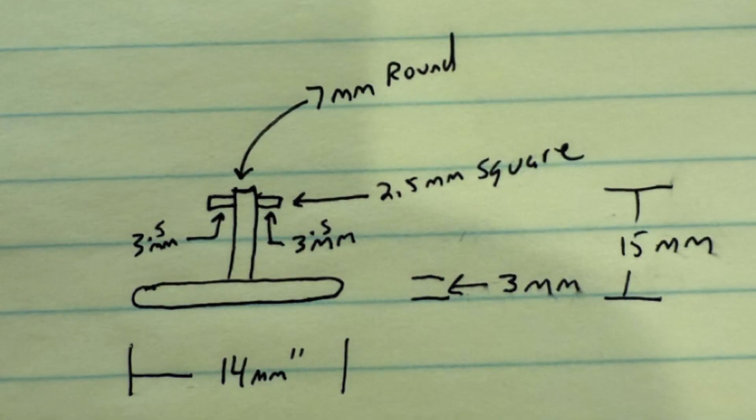Then we'll figure out how we'll build it. If you look at the part, you'll notice there's a large cylinder that makes up the bottom, a smaller cylinder on top, and two square extrusions that are clips. There's also a slot in the bottom.

After downloading and installing FreeCAD, you can start it by double-clicking on it, and we'll first create a new part by clicking the icons shown. We now need to give the part a name, and we do that by clicking Save and naming the part in the directory we'd like.

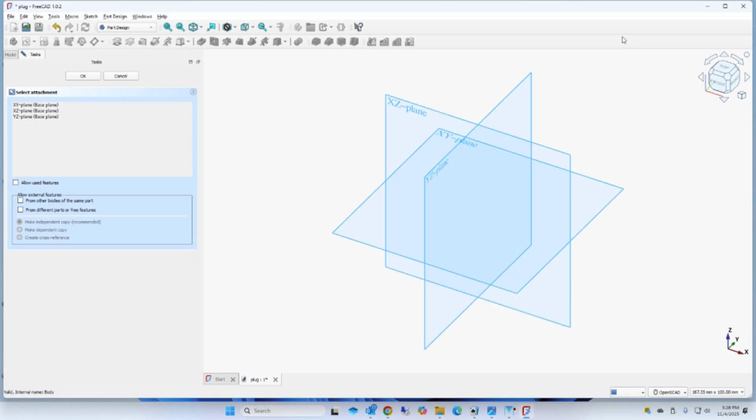And we'll call it Plug. Now you'll see that the name has changed. So first we need a body. The body is the actual part we'll be printing, and we did that by clicking the body, and now we're going to create a sketch for that body.

We select the XY plane and we draw a circle. This is the base of the part, and we're going to give it a dimension of 14 millimeters.

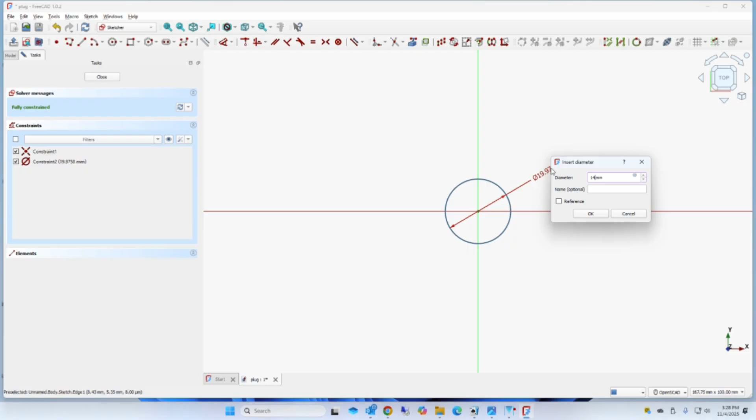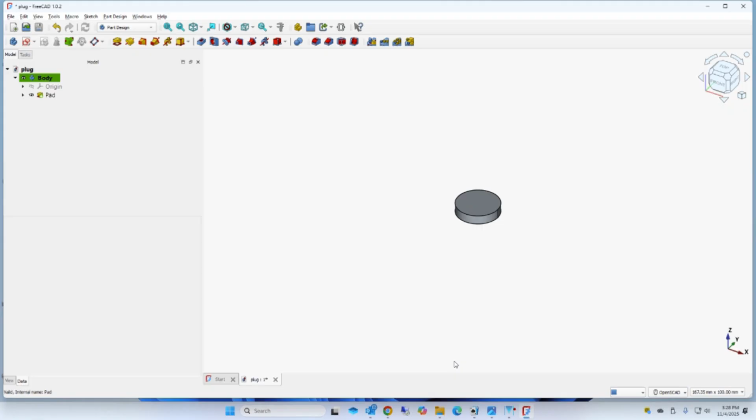We can now click OK, and we'll extrude that part by clicking the pad function and giving it a height of 3 millimeters. After entering the number by clicking off it, it'll change the size. We now have the part, a 3 millimeter disc.

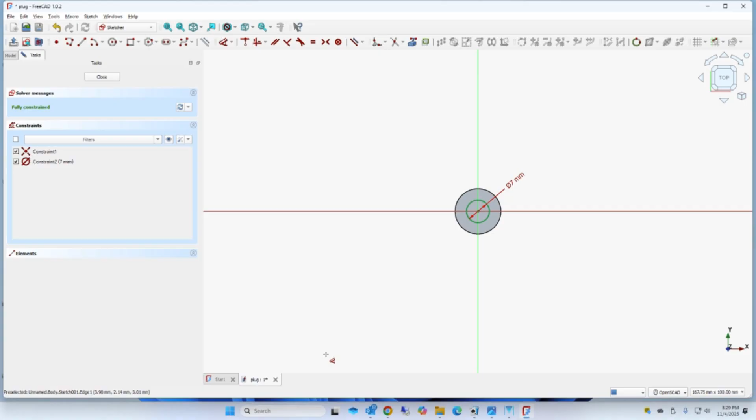We want to put another sketch on top of that disc for the stem. So we create a circle, just like we did before. We give it a dimension of 7 millimeters. We're fully constrained, which means everything's defined, and we click OK.

Now with it highlighted in blue, we're going to pad it, and we're going to make it 12 millimeters high, because the entire part's 15 minus the 3 millimeter base.

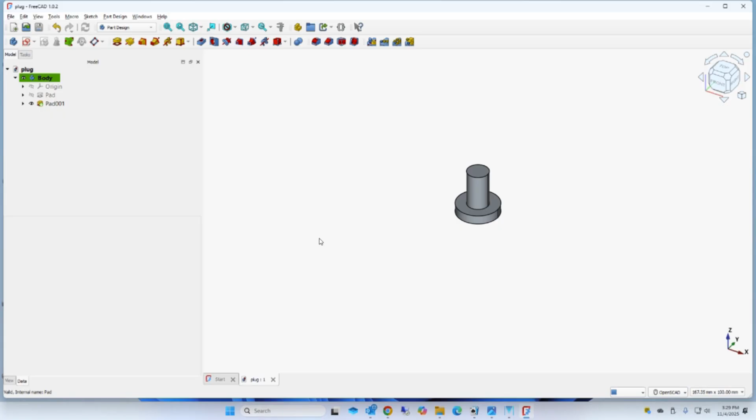Now we need to build the stem. Clicking the side view, we'll create a new sketch in the middle, and we do that by clicking New Sketch and selecting the plane for the side.

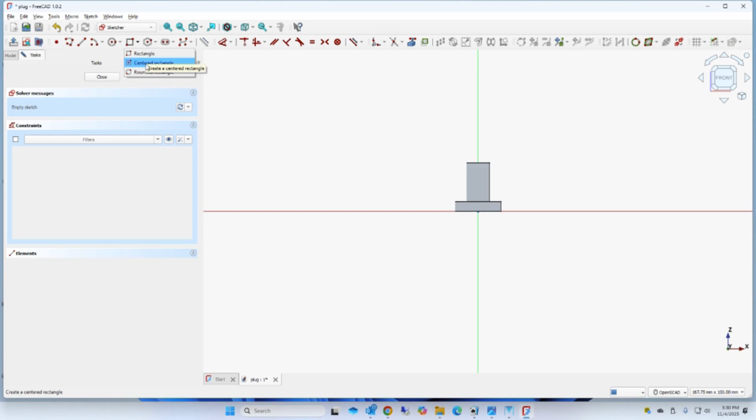And we're going to select a rectangle, and we want the rectangle that's drawn with a center section. And there we've created it. If we click the equal sign on the top and make the top and right sides equal, it's now a perfect square, and we only need to dimension one side, which we'll give 2.5 millimeters.

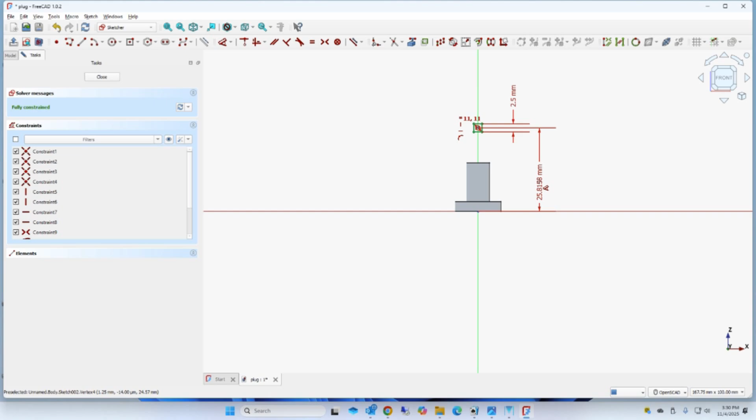The height will be set so that it's about 1 millimeter below the top, but I'm going to reference the bottom plane, so we can see the number I'm putting in now.

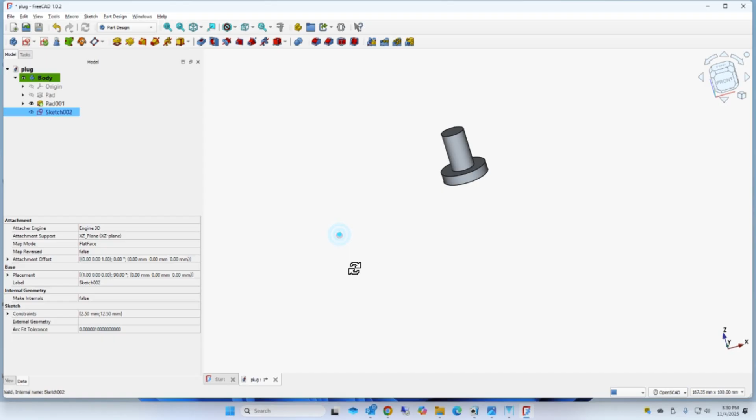Now it's hidden because it's in the middle of the part that we have. If we hide the part by clicking the eyeball, you saw the square. We can now extrude it.

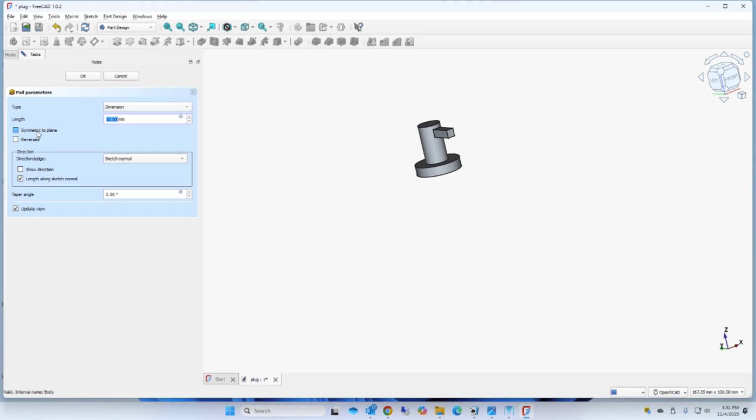We want it symmetric because we want it out both sides, and we want to adjust the length to be 14 millimeters. Now it's the same width as the base. When we're happy with it, we click OK.

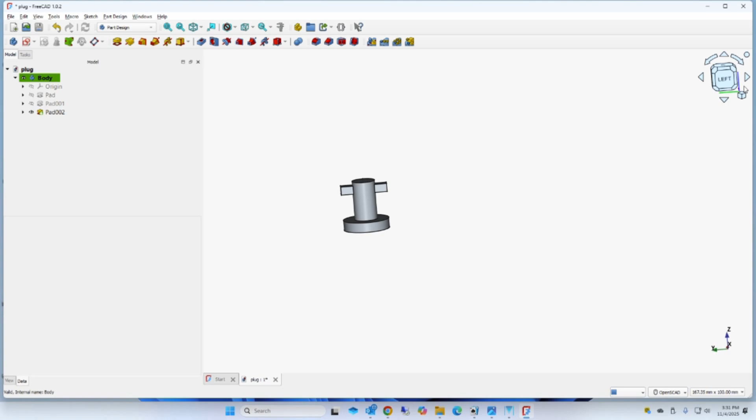Now there's only one more thing we have to do, and that's add the slot on the bottom. So we'll click a side that's at right angle to the latch on top. We're going to create a new sketch on that plane, and the sketch is going to once again be a center rectangle.

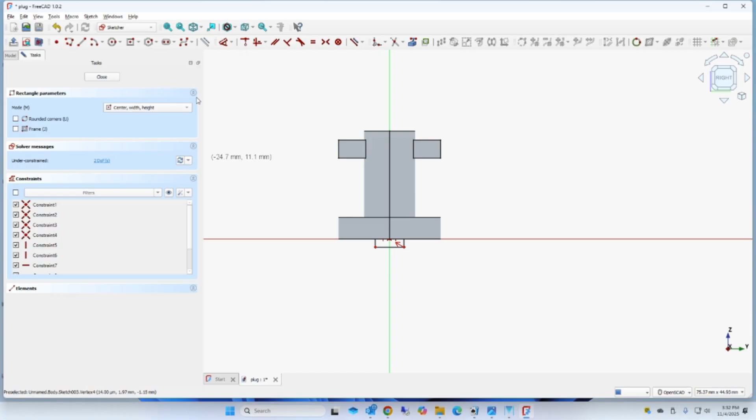And we're going to make the width of the slot 1.5 millimeters, and the height actually 1.5 millimeters... and the height 2 millimeters. So it'll be a 1 millimeter slot in the part itself.

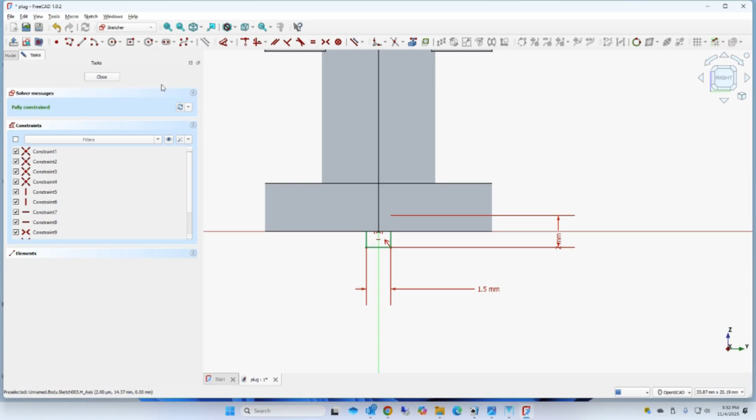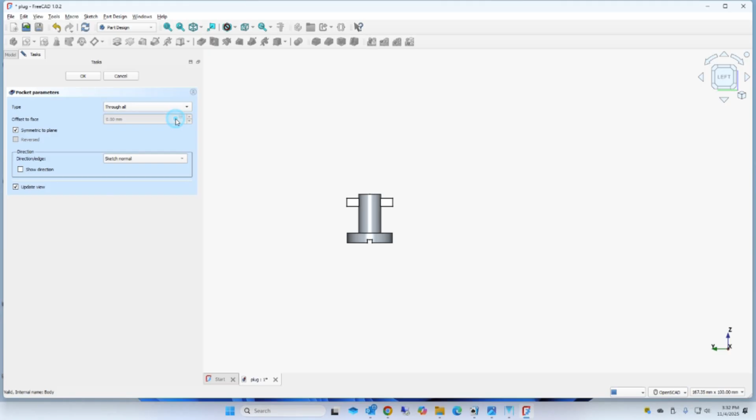We'll now pocket that. So we click the pocket tool, make it symmetric, and I can either adjust the length until it's shown as a slot, but a better way is to select the type and say through all. That way it'll always cut regardless of the disc size on the bottom.

So we've now created our full part. The only thing I want to do is add a chamfer at the top, which is just a little right angle to allow it to insert a little better.

So I select the very top edge, hit the chamfer icon, and say 0.5 millimeters. And there it is. Part is done.

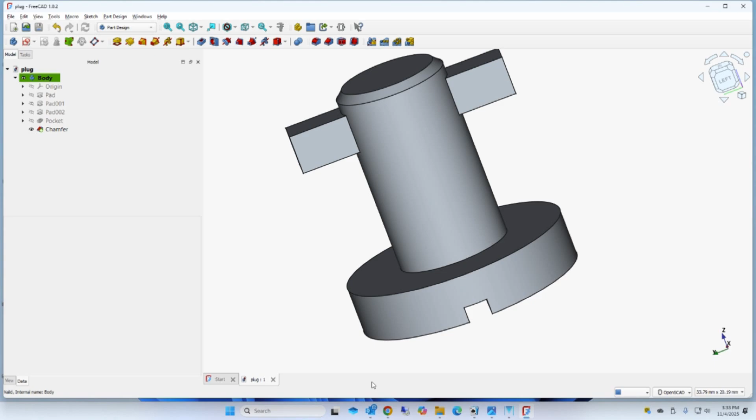So now I want to select the part when it turns blue by clicking on it, then File, Export, and I'll save it as Part 1 STL type file. I now have something I can print, and that was the entire creation and saving of the part.

So now we need to modify the part because it didn't quite fit. So we reopen FreeCAD and open the FreeCAD file, shown with the F, from where we saved it. We can do that by double clicking, and you'll see the part comes in.

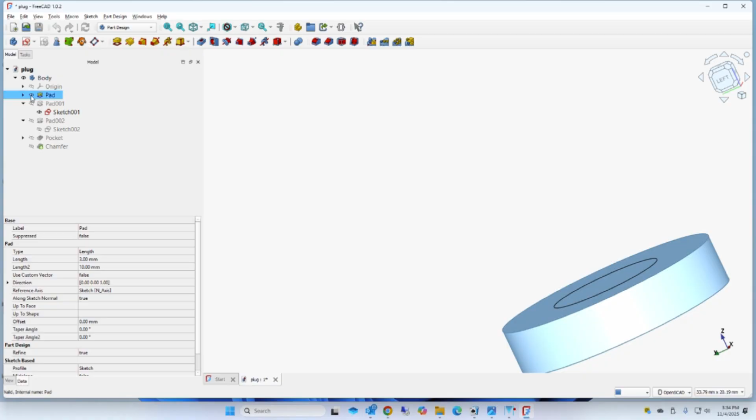Now let's say we want to change the size of the shaft. We have to find the sketch that's associated with it. We can do that with the little eyeballs, and if we see it, we know we've got the right one. So that's not it. There's the sketch, because it's not the big one, it's the little one.

So I'm going to double click on that sketch. If you ever lose your picture and need to get it again, you can click the keys V and F, or menu View, Standard Views, Fit All, and it will bring it back to the center of the screen.

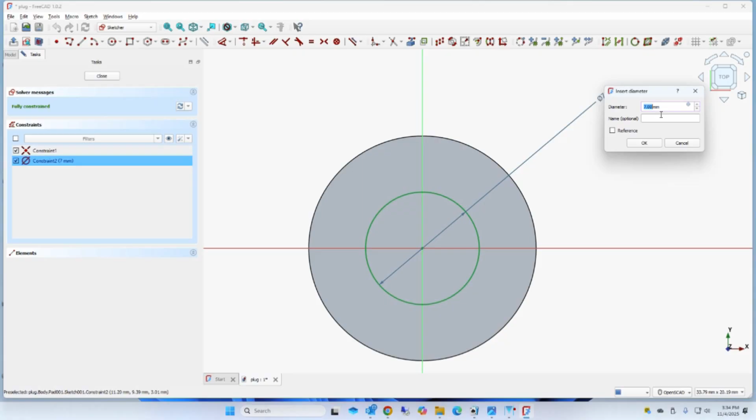Sketch to open it. I have to bring it to where I can see it, and I'm going to change it from 7 millimeters to 6. I did that by double clicking on the number, entering the new number, and hitting enter. Now if I look at it, you'll see I've made it automatically thinner.

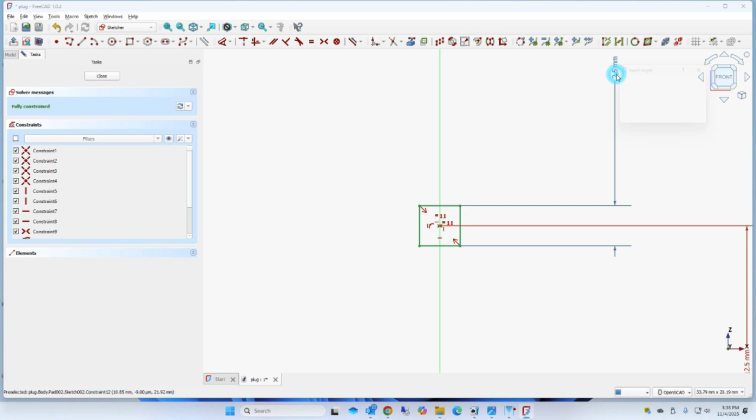Let's say that the shafts coming out the top are too big. I find them by clicking on the eye, and I can change just the one number by double clicking on the size, and I made it a smaller square.

Now let's say I need to shorten the length of the catch. I do that by double clicking on Pad 02 and modifying the length.

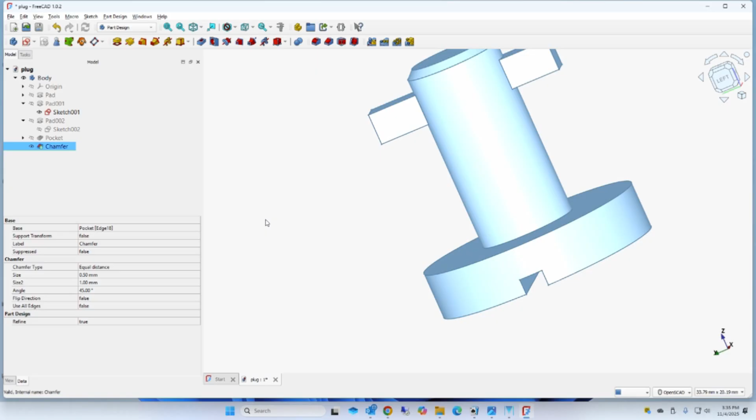Let's say I want to modify the slot. I can either change the sketch, which allows me to modify the square that's being cut out, and I can make the width and height whatever I want by double clicking on the number, putting in a new number, clicking OK, and same for the height.

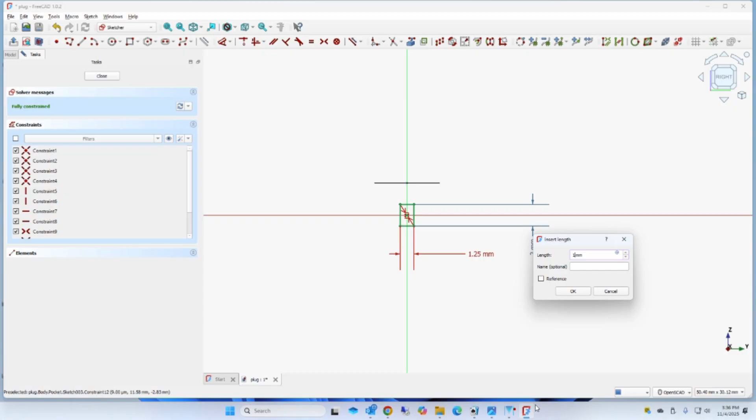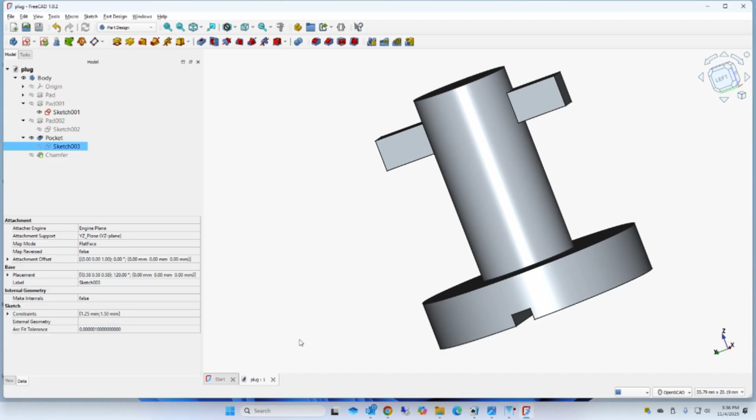So that's how you modify an existing sketch. Once you've done that, you need to save it in a format you can export to your printer, and you do that by selecting the body and clicking File, Export, and you export it to a file name in STL in a location you want. That's all there is to it.